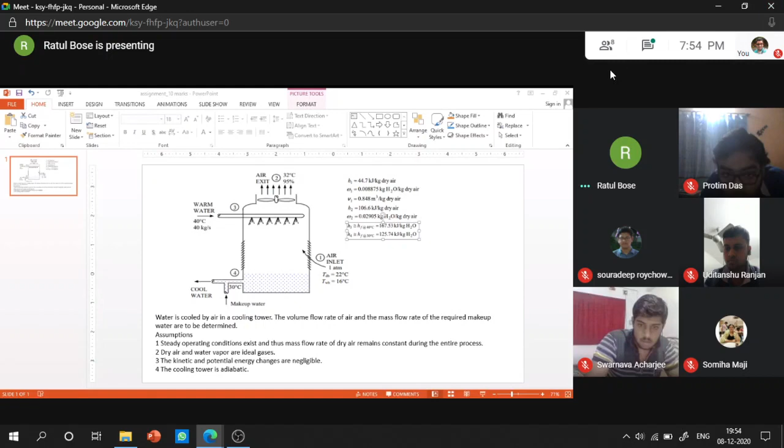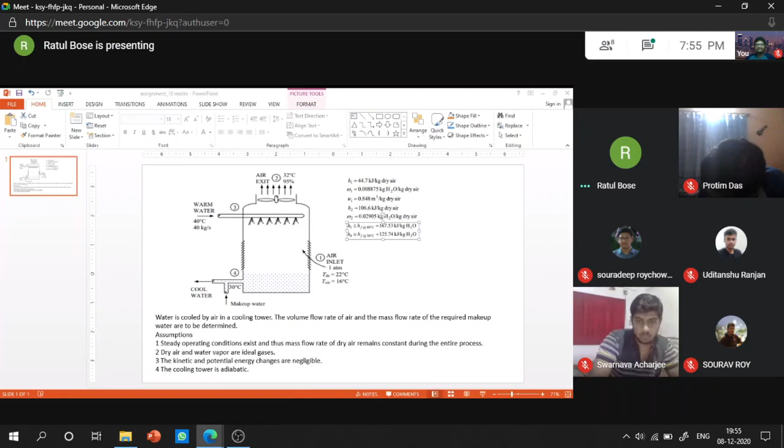Sir, I am also switching to computer. Right, okay, no issues. No, sir, I have not sent to them. Why? Hello? Why? Sir, I'm still doing. Still doing?

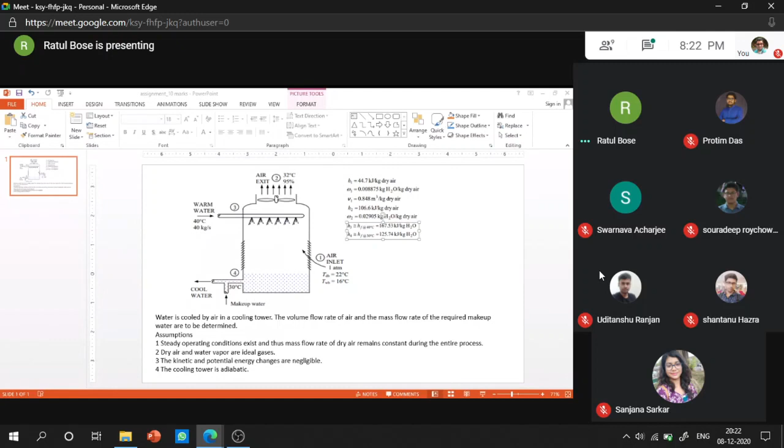Wait a second. Okay, in the last class, what I've done is rock beneficiation, and now I'm going to discuss the details about cement production. For that, I'm going to share my screen again. Can you see it? Okay.

So again, I will start from the PFD. So where are we? Here, the beneficiated rock slurry. We did this, okay? So after the beneficiation, this will be your feed or raw materials for the final stage for the cement production. Apart from that, the high grade limestone and the clay has also been fed. These high grade limestone and clay are in powder form, and beneficiated rock slurry is in slurry form or wet form. Okay, these two together fed in the filter.

Only the beneficiated rock slurry can be fed directly to the rotary filter, and from there to the reactor. But your powdery material has been grinded beforehand, then it has been fed to your rotary filter first. So we are here. We already beneficiated the rock slurry. Then I'm coming to the high grade limestone and clay. The ingredients used in this process are typically the limestone, the clay, and two other important things: gypsum and coal.

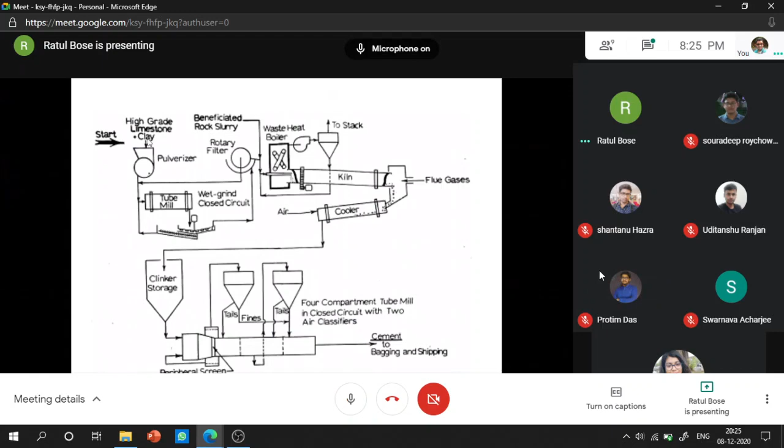Okay. Did you start your recording? Okay, very good.

So instead of feeding only the limestone and clay, we have to feed the gypsum and coal together, along with some iron also, the iron you get from the blast furnace slag, etc. That is very minimum required; you can eliminate that also. But apart from the limestone and clay, you need to provide the gypsum and coal in the feed. Why do you use the gypsum and coal? That will come later on. So these are in solid form, in powdery form.

Here first it has been pulverized. What are the modes of pulverization? It can be done by crushing. Crushing may be rough crushing, coarse crushing, or fine crushing. And then finally it is put through the wet grind closed circuit. And what do you mean by wet grind closed circuit? Anybody having any idea about that?

First, let me tell you the pulverization step. It is first done by rough or coarse crushing by gyratory or hammer milling. I told you before how the gyratory and hammer mill works. So this pulverization step is by hammer or gyratory milling, and then the underflow has been treated in the tube mill for fine crushing, and the overflow has been repulverized again. It is not an open circuit, it is a closed circuit.

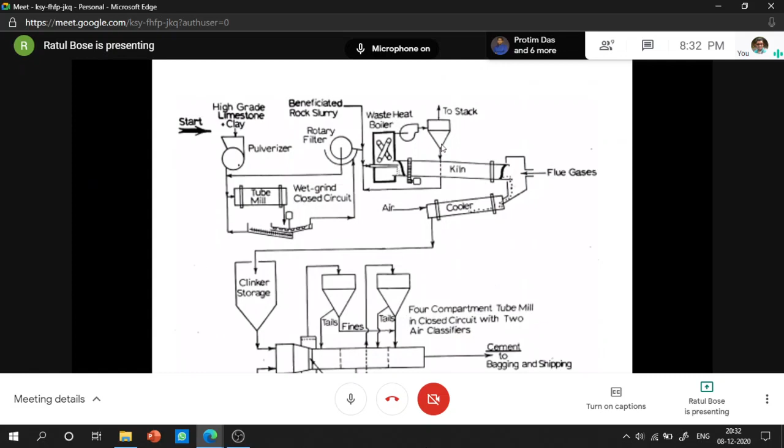Okay, so the dry powder and the wet slurry has been fed to a kiln. It is connected to a waste heat boiler. Why the waste heat boiler? Because you need a huge amount of heat to fabricate the cement, and the waste heat has been recovered using a boiler over here. That is not so much important over here. I will be mentioning why.

So this kiln resembles a large horizontal pipe with one end raised slightly. The raw mix, here the powdery and the wet slurry, has been placed at the higher end, and the kiln rotates, and the material moves slowly towards the lower end. Okay? At the lower end, flame jets are assembled. What do flame jets do? They provide the heat. The temperature is set at 1500 to 1650 degrees centigrade to produce not the final product but the initial product of the cement.

What was done? Through the rotary filter, the rotary filter filtrates the heavy material. Again, it goes to the pulverization section, as it is a closed circuit, it has been pulverized again, and the final material goes to the kiln.

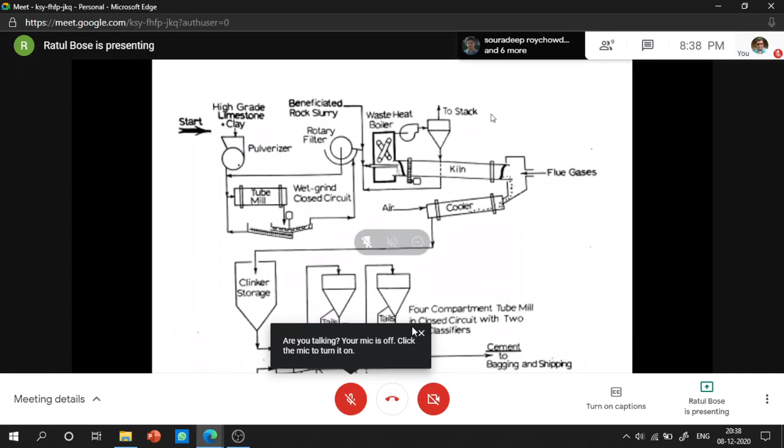This is called surface adsorption. Surface adsorption is preferred near the depositing materials. If the reaction happened earlier, molecular diffusion might take place. At that point you might not get the powdery material for compaction; you might get gases. When the reaction occurs very near to the surface, here the surface means the end of the kiln where the cooler is connected, the cooling substrate is your surface, so the reaction occurs very near to the cooler surface.

Once the material is formed, it cools down instantly. Hot clinker has to be cooled down instantly, so a cooler has been assembled. If high temperature were imposed earlier and your cooler is set at the end, diffusion would take place before adsorption. Before converting to powder it would diffuse away, meaning gas would be created instead of powdery materials. Understood?

So that's why the heating fire jets are assembled at the end. Hot clinker is compacted powdery material of 3 to 10 millimeters in size. Now the reaction condition: the residence time for the reaction is generally 1 to 3 hours. The feed mixture is decarbonated and fused to form cement compounds.

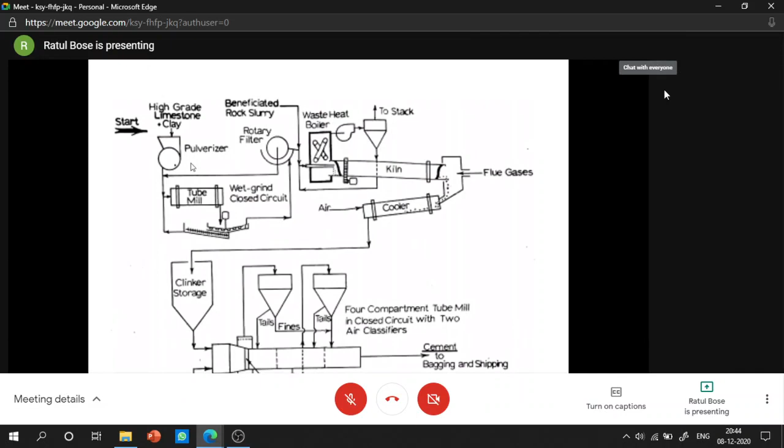প্রথমেই বলেছিলাম, along with the limestone two different things are added, that is gypsum and coal। Coal is used as a fuel to heat the raw materials in the cement manufacturing process।

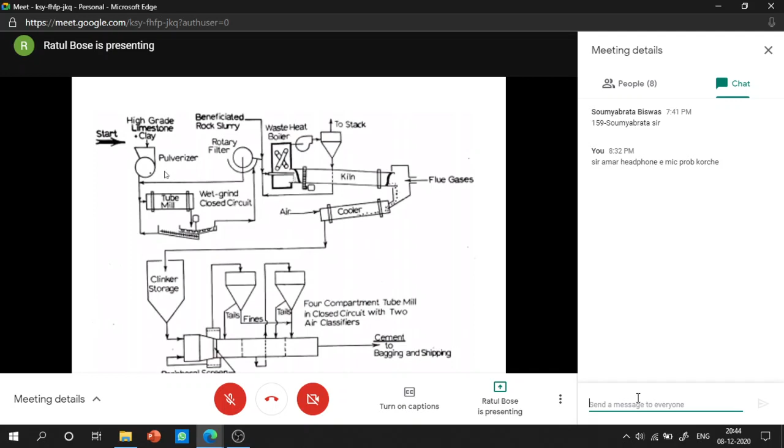Gypsum has been added for a particular reason, it is added during the grinding process to control the cement hardening process। Cement tends to get hardened, তুমি যদি বাইরে ফেলে রাখো সিমেন্ট তাহলে দেখবে এমনি হার্ডেন হয়ে যায়। তাই processing এর সময় gypsum যোগ করা হয় এই hardening control করার জন্য।

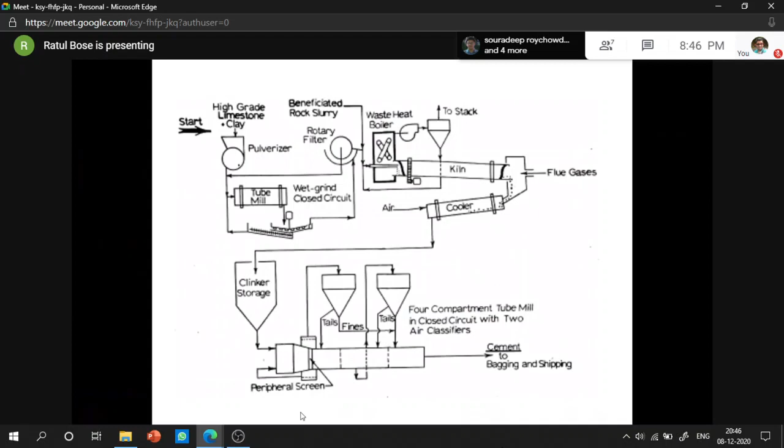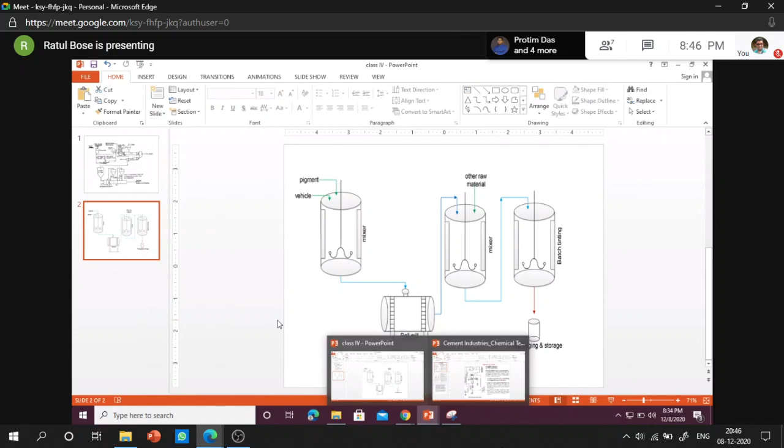আজকে আরেকটু ছোট্ট একটা জিনিস করিয়ে দিই, তাহলে মোটামুটি এগিয়ে থাকবে। That is called paints। Paints are stable mechanical mixture of one or more pigments which impart desired color and protect the film forming।

Paints কি রকমের হয়? You have the exterior house paints, interior wall paints, those are different। Emulsion paints and fire resistant paints। Chemical resistant paints are there, those are not being used often in the house। Generally these 4 kinds of paints we are associated with in the house: exterior house paints, interior wall paints, emulsion paints and fire resistant paints।

তোমরা যদি নোট ডাউন করতে চাও করতে পারো, না হলে just follow the things। Exterior house paints have general constituents such as pigment। Pigment কি হয়? Zinc oxide, titanium oxide, those are all pigments। Extenders, like clay is an extender। Vehicle, like linseed oil is a vehicle, যেরকম আরও তেল ইউজ করা হয় সেগুলো vehicle হিসেবে paints এ। And thinners, naphtha, spirit etc. are the thinners। These are exterior house paints material।

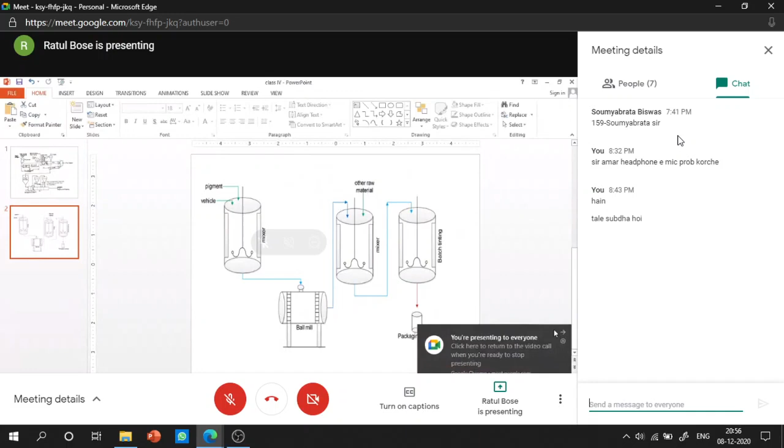Distempers are water paints consisting of pigments, which may be white as well as colored. Colored distemper and white distemper both exist. For colored distemper, like rainman green, if you go to a shop and ask for rainman green, that is colored distemper. People are using these things nowadays.

It consists of extenders like I told you, such as chalk powders. The binders are sometimes glue. And the dispersion medium is water - here water has been used as the dispersion medium.

So distempers are water paints. These water paints have very good covering power, easy applicability, and smooth and pleasant looking durable film. Generally these should not be used outside. Distempers are being used on interior walls. Sometimes one coating of distemper is done outside, then other things on top. Generally distempers have been used inside as interior wall coating. This forms a durable film, but it's a water soluble film.

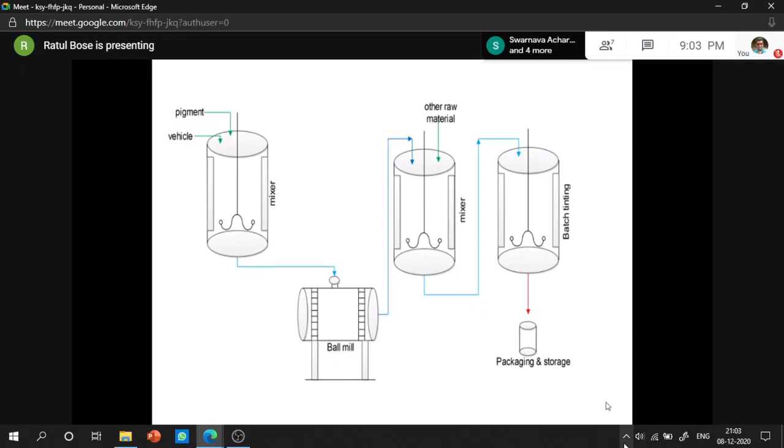Why does the color change? Because as it is a chemical process, it changes its color - maybe reduction takes place, maybe oxidation takes place. So due to this oxidation reduction, it changes the color. If you use the dye, it changes the color.

If you use the pigment, it won't change the paint color, but sometimes dark spots will be there because it's a physical process. You need the binder to attach this thing, but the binder's capacity changes. When the binder loses its capacity, then spots of pigment you can see - just brush it out and it will be fine. So this is the beauty of using pigments in the system.

Another important thing - constituents, extenders. They are used to decrease the cost of the paints, and to supplement the pigment sometimes, and increase the covering and weathering power of the film.

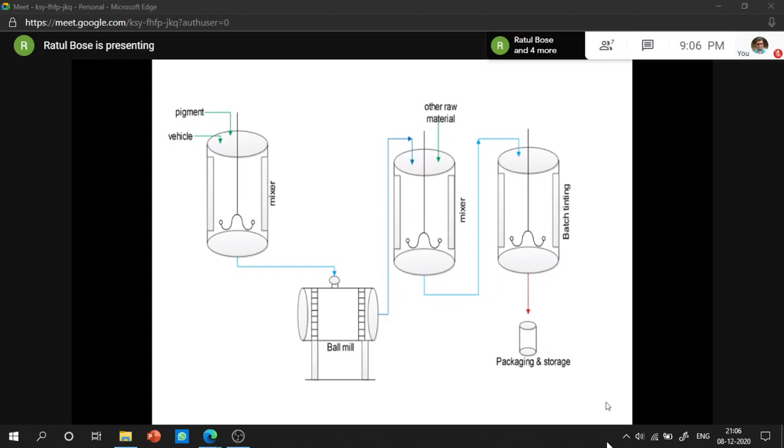So for the polymerization you need the unsaturation - in fourth year polymer you can read this in detail. You need the unsaturation. So polymerization can be accomplished by breaking down those unsaturation bonds, and polymer can be formed.

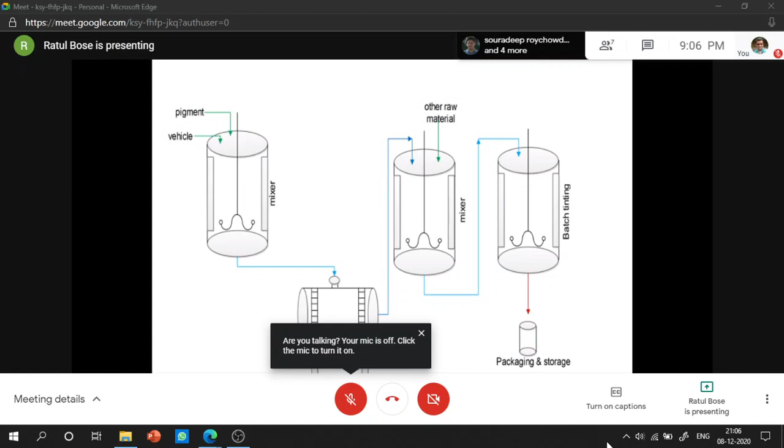Let's say polyethylene - there the monomer is ethylene. Ethylene has the unsaturation, CH2 double bond CH2. So double bonds can be broken down to form the polymer of ethylene, called polyethylene. By this way, linseed oil etc., having the unsaturation, those unsaturation bonds can be broken down to form the protective layer or polymer film. So this can act as the film forming material.